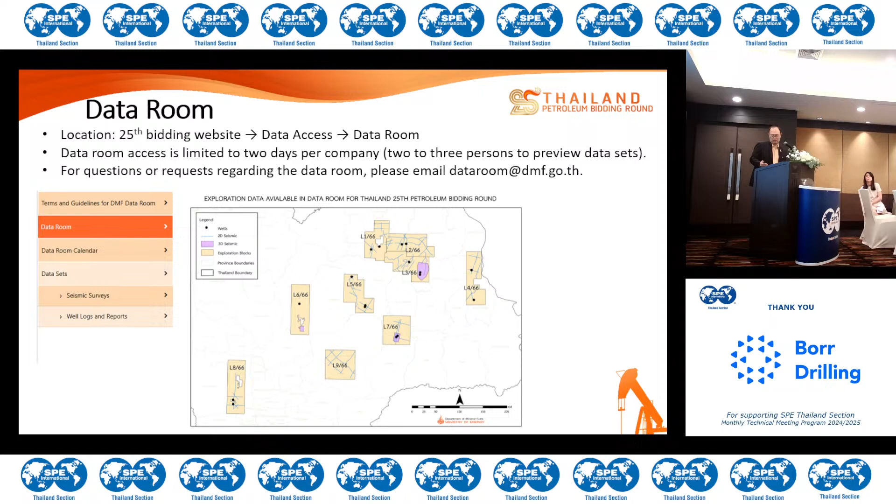Basically, the goal is to preview data sets. So not all the data sets will be available in the data room. Only some are selected. But a lot more data is available, right? To get to a data set, you go to the DMF website, go to the 25th bidding round website and data access, and click on the data set tab. So data sets can be purchased. You can select the seismic lines that you want. You can select the wells that you want. All the prices will be available in the Excel sheet, and you can check out the details later.

Okay, that's it. Thank you for your attention. If you have more questions, go to the website, right? If you have general questions, email Petroleum Bidding. If you have a question about the data room, email data room. If you have a question about data sets, email DMF e-commerce, right? Thank you.

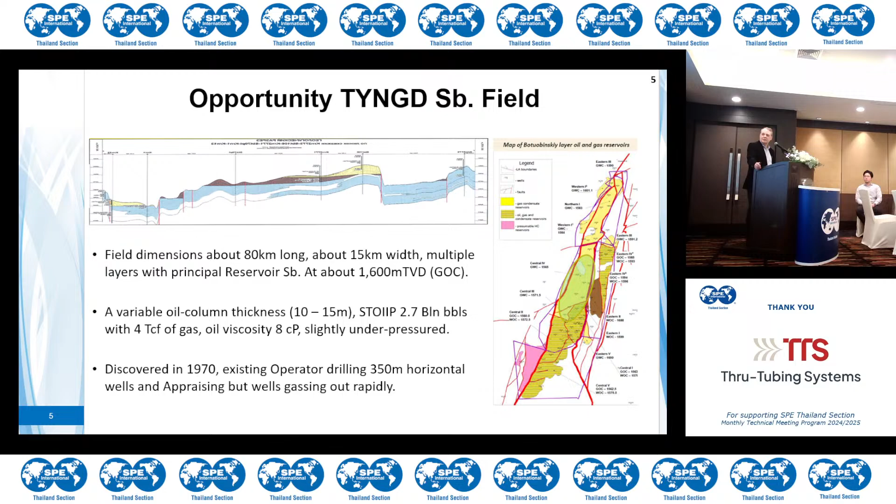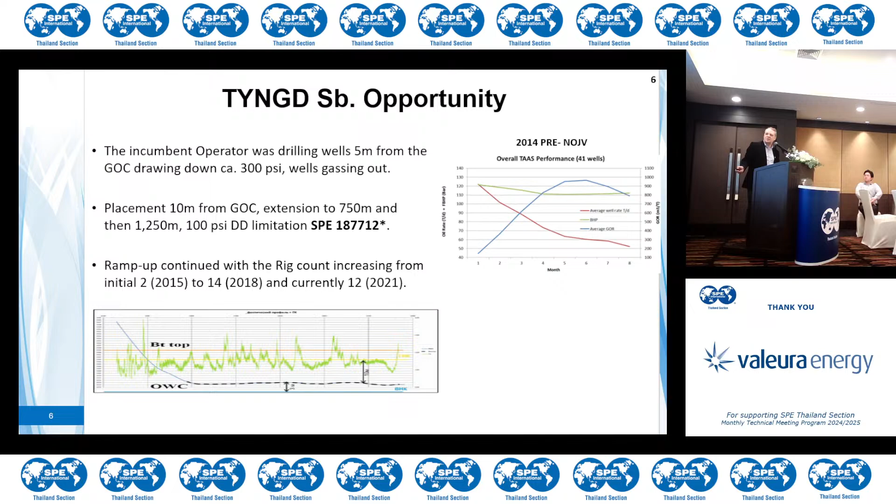So the incumbent operator was drilling wells about 5 meters from the gas oil contact, drawing down about 300 psi, and not surprisingly, the wells gassing out. Placement a further 10 meters from the GOC, an extension to 750 meter horizontals, and then 1250 with a more limited drawdown allowed some more longevity in the wells, if you like. But a plant was well underway that could produce 100,000 barrels a day. This approach, because more of the field was turning up below gas than originally perceived, was not going to deliver the PI on a well basis to fill that plant.

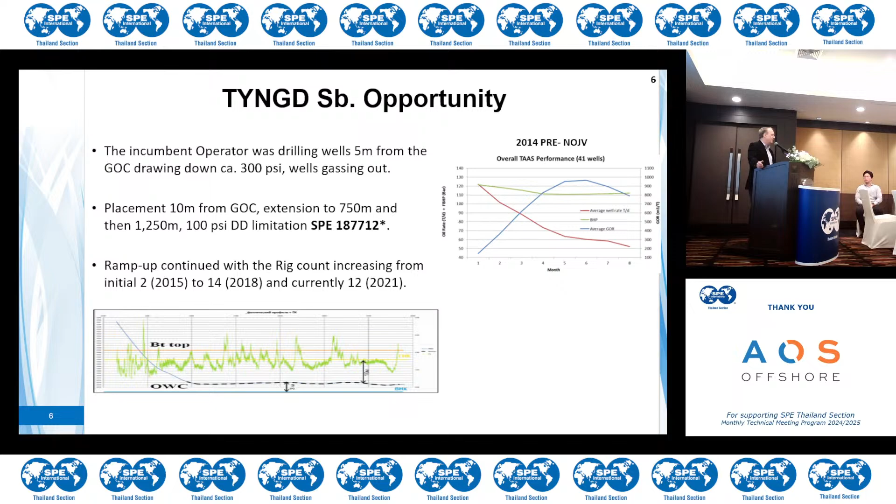The obvious answer would have been to produce at 50,000 barrels a day and pace the development appropriately. The management don't like that when they've invested in a plant that's twice that capacity. And the rigs are arriving. You know, the logistics are in place. You've got the winter arrivals coming. We're up to 14 rigs now, constantly increasing. So real problematic. And this is just a plot of what this looks like.

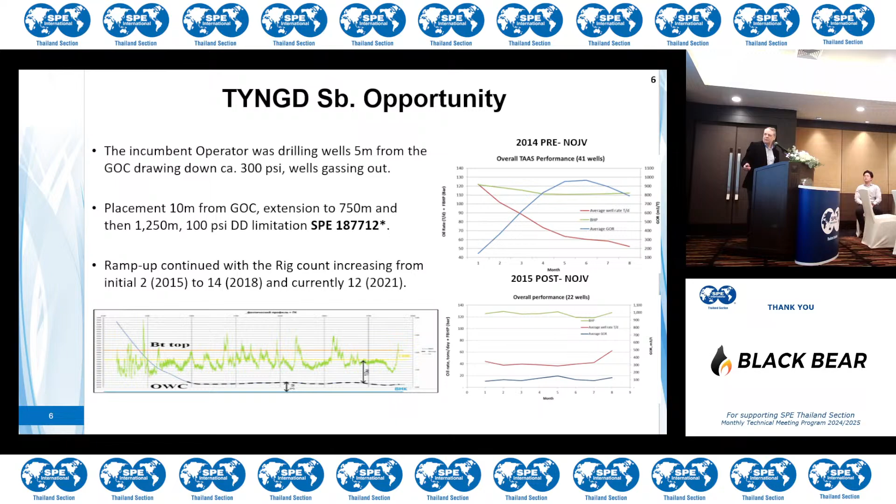Here we can see a GOR increasing on the original well styles, and when we were able to drill some of these wells, we could keep the GOR in a more reasonable position, but there was a limited amount of thickness that allowed this to be done, and a limited amount of locations that we could pick to progress that.

So we had to think of other solutions, and the next solution was to start determining what a more appropriate drilling approach might be. Appraisal information started to come in from the southern wells, indicating that it was mostly below gas and not above water. The STOIIP reduced conveniently from 2.7 to 1.8, which put more pressure on the team to make this an economic outcome.

And as I say, northern bias with the formation shallowing to the north, so getting closer to the gas. And the field geometry moved from this 25% above the gas and 75% above water to much more the other way around. So a real problem. Plant commissioned, expectation of 100,000 barrels a day, smaller field, reduced drawdown. How are we going to manage to deliver that?

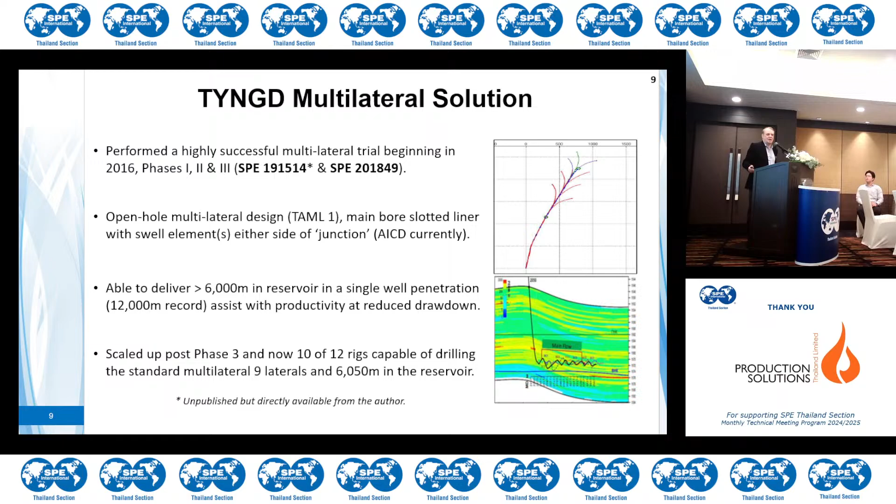This is what the core of the field looked like after further appraisal had taken place. And there was a solution. It was a relatively straightforward one. It was Canadian style, TAML 1 level multilateral drilling. Very, very successful. Started in 2016 and passed through 3 phases of experimentation in what could be done.

This is what a standard multilat started to look like, with, in this case, 7 laterals and the mother bore just tailing off there. And these were delivering about 6,000 meters in the reservoir versus the original 350, 400, 750, 1250. So basically a lot less drawdown, but a lot more exposure within the reservoir. And now you're able to deliver the PI on a well by well basis that will give you a solution for the same wellhead count or less.

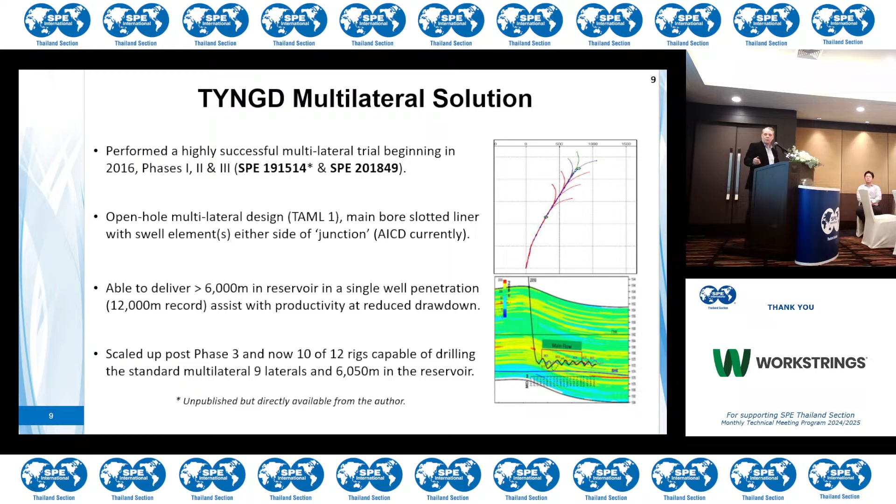So this simple TAML 1, originally all open hole, drilled out from the heel, as I say, Canadian style. If you go to the Shaunavon, which is kind of the tight sands north of North Dakota, getting into Canada, you'll see wells with 25 and 30 and 40,000 meters drilled in the reservoir. As long as the drilling's fast in the reservoir, it's a really great way of creating PI. Simple junctions, though, is the solution.

And in this case, we did start to add a mother bore. So we would run a liner in with swell elements and a sliding sleeve opposite each lateral window, so that if GOR showed up when you're changing ESPs out, you have the opportunity to experiment with closing a sliding sleeve or two very easily. You're going to change the ESP. It's just a little bit more jointed pipe to go on a pulling unit to go and close one of those sleeves. So able to deliver 6,000 meters in the reservoir in a single well.

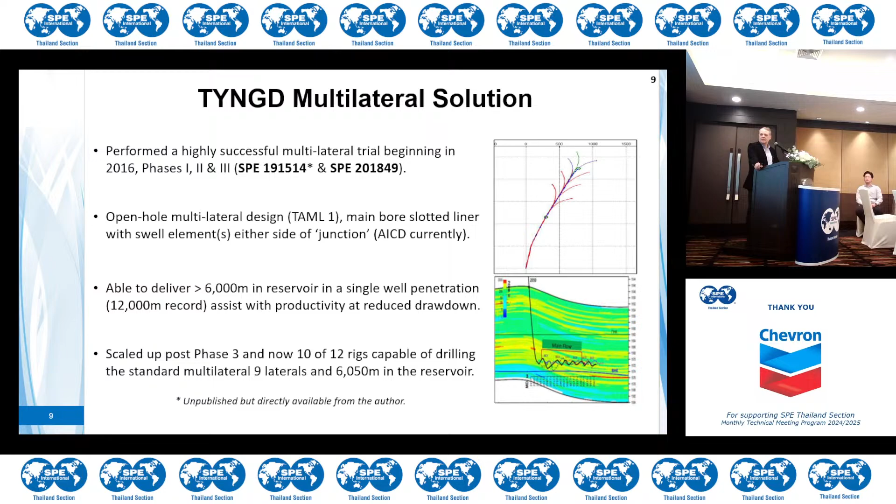12,000 meters was the record, something we called a birch leaf, and it assisted with the productivity at this reduced drawdown, and scaled up post phase 3. And now about 10 of the 12 rigs that we had were capable of drilling these. The standard multilateral with 9 laterals and 6,000 in the reservoir. So a huge learning curve that's in the papers.

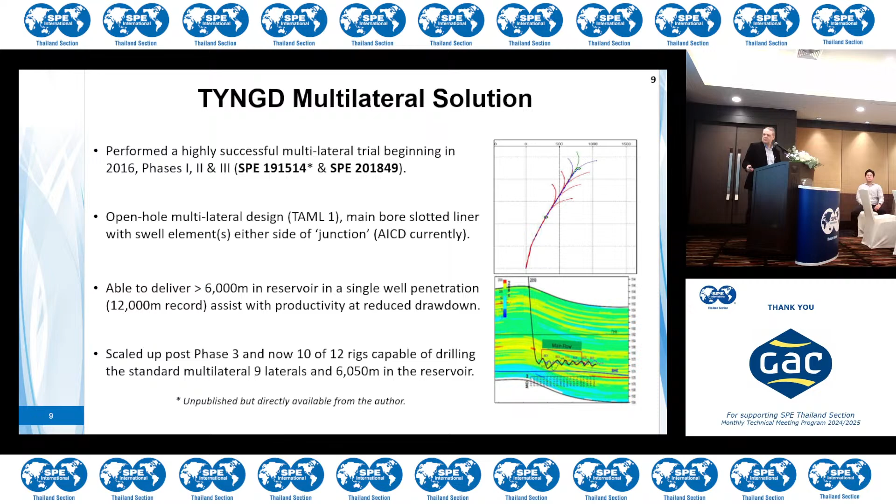This talk isn't really about the multilaterals, but the window cutting in open hole within the reservoir was originally taking about 12 hours to do, and I think they got it down to an hour and a half. So it just gets faster and faster, as drillers tend to, and relatively straightforward.

Usual pad completed with 15 horizontals by the incumbent on the original design, 400-meter horizontals, but a multilateral pad only requires 7 wells. Average drilling time was about 40 days for one of these 1250-meter horizontals. Started with about 60 days, down to 50 when I left in 21, and I believe down to about 35 now. The PI increasing 4 to 5 times on a conventional horizontal, and the cost just fractionally more.

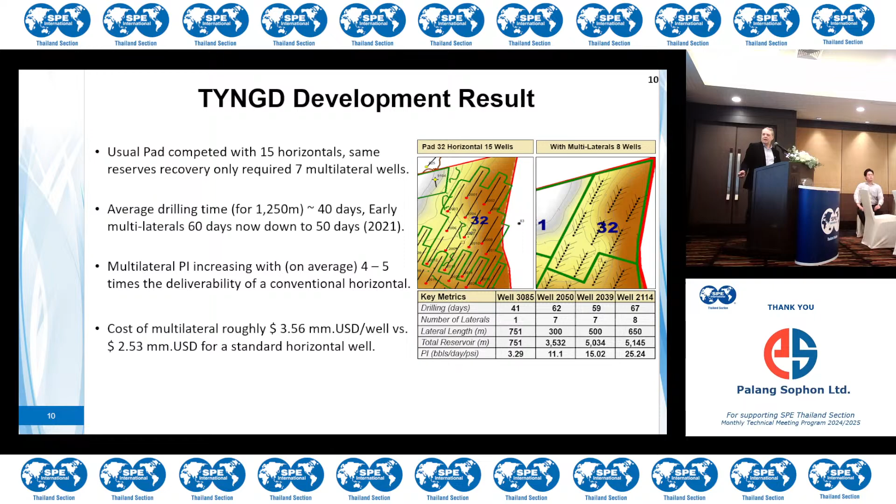In terms of you're in the reservoir, you've done the overburden piece, and now you're just adding reservoir coverage, and the numbers work out here. So an 8-well multilateral pad can deliver about 8,500 barrels a day for about $28.5 million, where a standard 15-well horizontal delivers just over half that for considerably more cost.

But that's not what this presentation's about. We've been presented with one problem. The reservoir's totally changed. It's halved in size. It's mostly below gas. What are you going to do? And the reaction time was quick, and everybody pitched in, multilaterals, straightforward. Now we're great. Now we're hauling oil off, and now we're getting major losses in the reservoir.

There'd always been losses in the reservoir, but now there's no gas injection taking place because that bit of the plant hasn't been built yet. But they want the 100,000 barrels a day. We're drilling the wells fast, we're hauling the oil off, and things are going to hell in a handbasket in terms of losses.

So, quick overview of the casing design. There's an upper cemented piece just out of the casing above the reservoir that requires this, but it's open hole with this liner in. Pore pressure just subnormal.

There'd been no LOTs measured, or FITs, during the original work. So some leak-off tests were taken, and the fracture gradient appeared to be well above what we thought was the fluid density, the ECD in the reservoir.

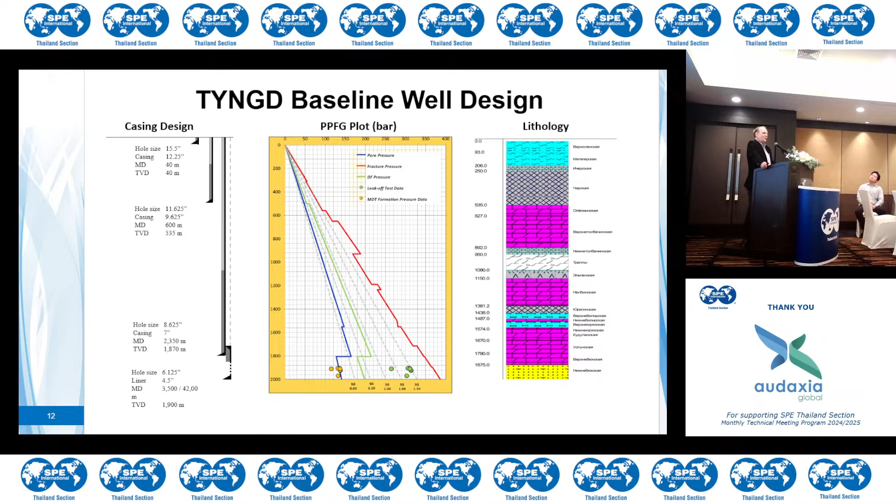However, there were features. We'd had losses in the reservoir. So just think of it on a probabilistic standpoint. You're going up from 400 meters drilled on the original horizontals in one direction. Now you're doing 6,000 meters in a 2-dimensional pattern. Your chances of hitting losses are going to increase if there are some features, and sure enough, that's what happened. So losses in the reservoir had always taken place, and on occasion appeared to be related to features.

So you could draw a map, a plan view, and you could see: I'm drilling my second horizontal off this pad, I'm going to be hitting losses soon because I did on the well next to me and the well next to that. So there were these uncertain features that appeared to create these losses.

Conventional fluid loss approaches had been used, but were becoming increasingly ineffective over time. As a petroleum engineer, the solution that was being applied was not one that I could really sign up for, and that was pumping cement in the reservoir. Effective sometimes in terms of curing the losses, but also curing production as well, quite nicely.

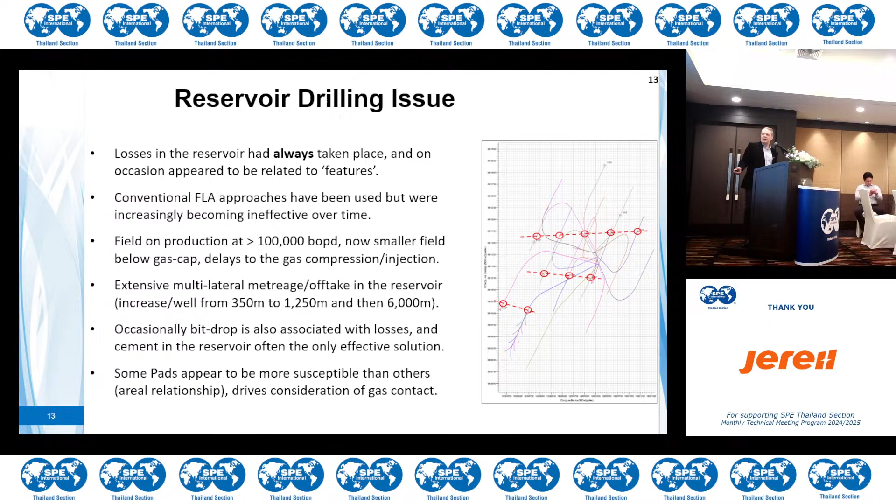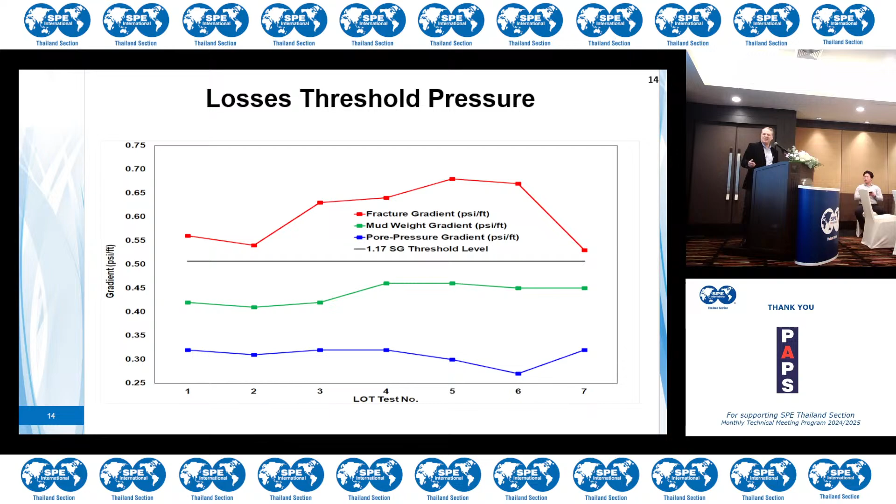And again, some pads appeared to be more susceptible than others, some kind of areal relationship, which was also a feature. Frac gradient likely to be around here. There seemed to be this threshold pressure, ECD, at which we opened things up, and that was an interesting fact. And the mud weight itself and the ECD, mostly below that in the early wells, but I'd say coming to cross this with time.

Cost of the losses in the pay zone. So cost of lost mud is relatively easy to calculate. It's very finite, it's a consumable, and we can see over the 3 years that this is increasing. We're up into $3 million worth of lost mud.

Rig NPT dramatically increasing year on year. Lost meterage drilling, which turns into lost meters of production. And so the percentage of multilateral wells encountering it increasing as well, or the percentage of multilateral wells being drilled, I should say, increasing as well. So more multilateral wells, more losses, more cost.

You're going up from 2 million to 12 million to 16 million. Where is this going to end? Is the fear. Number of multilaterals - so just the numbers in a tabular form here.

Tailored LCM pills were being used, carbonate plugs as well, cement plugs, multiple cement plugs placed in the reservoir before eventually giving up on that location and moving on to the next one. And so lateral abandonment early in the drilling feature.

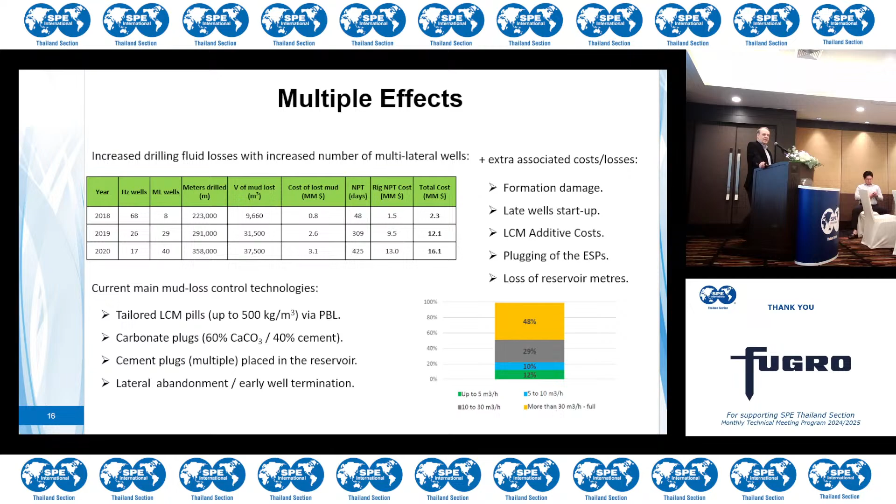And here's the interesting thing: Eastern Siberia, of course, just like Canada, lots of snow in the winter, but just like Canada, free water is really difficult to get hold of. There is none - it all drains into Lake Baikal. Lake Baikal holds 20% of all the fresh water on the planet.

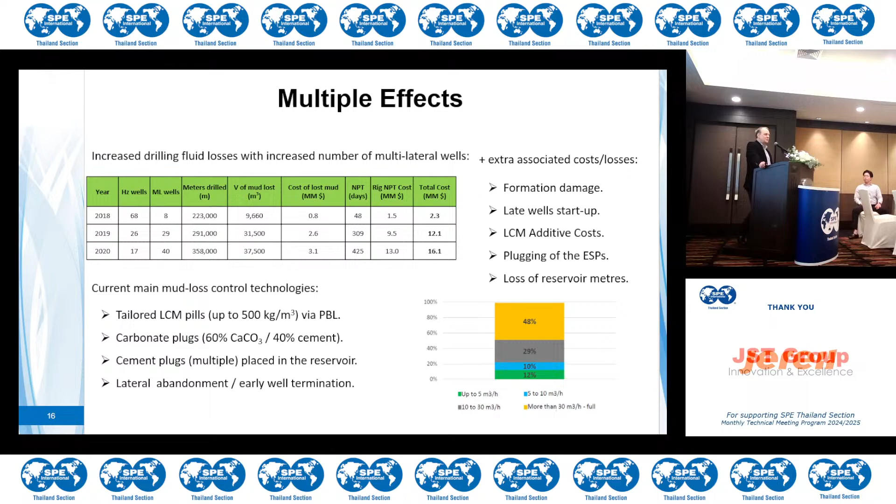It's a mile deep and 700 kilometers long, and the entire eastern Siberian plain drains into Lake Baikal. There is no free water, no running water. So it's very difficult, we helicopter water to rigs on occasion. That's what we have to do to move water in. So mud losses have this logistics issue associated with them as well, which is not the norm, and you have to cope with that.

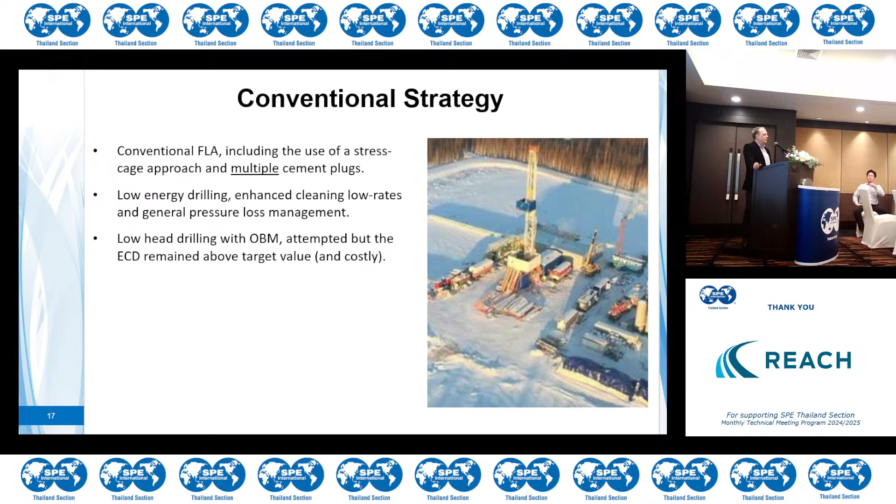So many facets to this issue. Trying conventional fluid, we all know the treadmill of dealing with losses and the increasing cost and complexity that this contains. Conventional fluid loss additives, perhaps use of a stress cage approach, which I'll talk about later. Multiple cement plugs, but reducing impact of that approach. We looked at low energy drilling, dropping all of the pressure drops out of the system wherever we could, and gained ourselves a little bit of time by doing that.

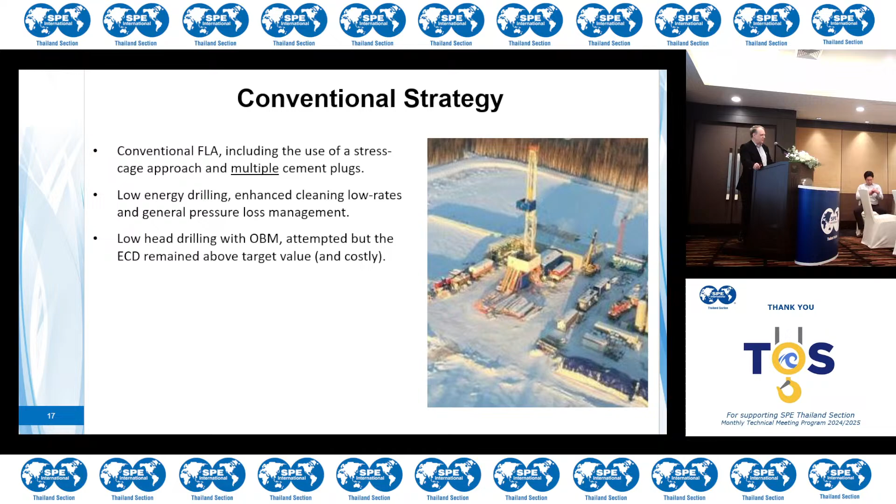And then low head drilling with oil-based mud, we attempted that as well. We converted a rig over and did a couple of wells, but it wasn't as effective in terms of ECD as we'd hoped. And because we're drilling multilaterals, you've got a lot of ECD when you're drilling these laterals, a lot of small hole with the assembly in. And it's costly because the rules have changed in Russia, so disposal of OBM, you kind of own those cuttings for the rest of history, the next 100 years. You don't just dispose of them and pass them on, you are liable, and it becomes very, very costly to manage.

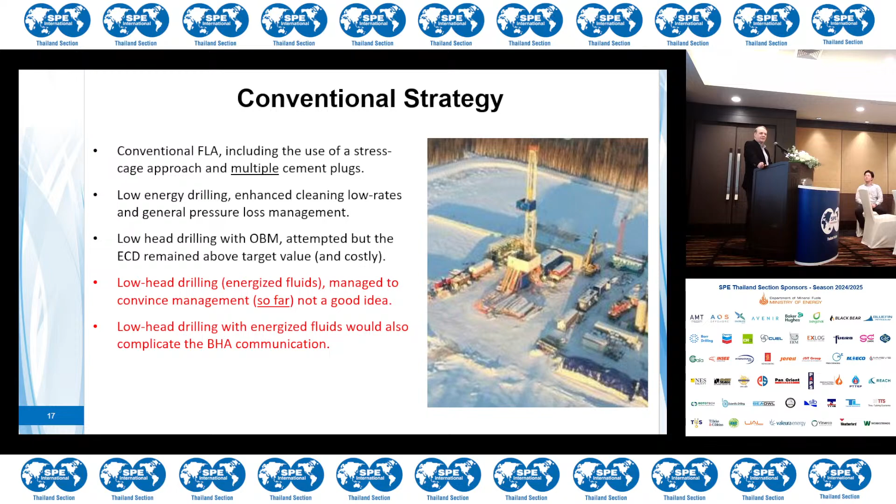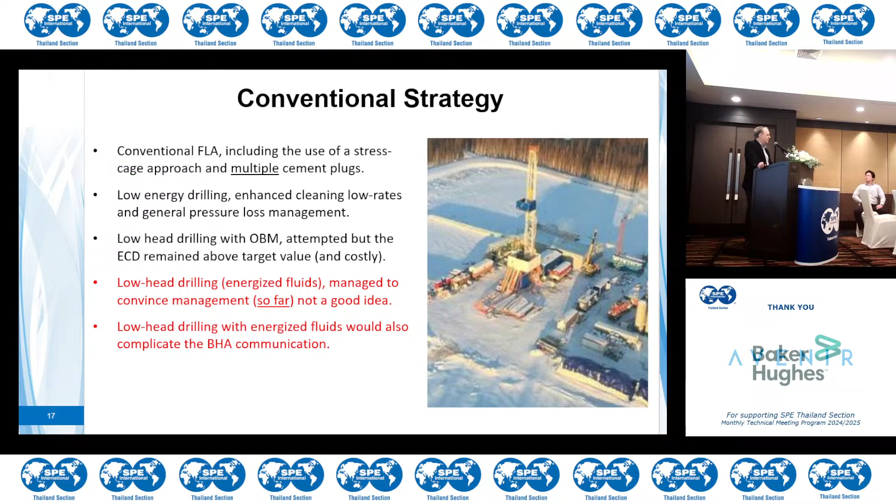OBM cuttings. There'd been a lot of enthusiasm for low head drilling, like energized fluids, and I put this down to technical engineers. Our technical disciplines are very much like our children, we prefer our own, and we love working on things that are very interesting. So all the engineers wanted to do MPD and energized fluid drilling, but think 12 to 15 rigs with rotating heads, nitrogen generation, in the depths of winter, in the middle of nowhere, with poor logistics. Technically extremely interesting, but absolutely costly. Costly in terms of just the physical cost, but also the HSE cost, because it's not an oil field that's going to do high tech very easily.

Again, it's much more like Canadian style oil field, more the agricultural end rather than the space race end of the field. So we also needed BHA communication, because you're trying to directionally drill these multilaterals, you need that ability to communicate. And as you know, that becomes increasingly complicated in energized systems. The solution we actually implemented, which was quite novel, was low head drilling using entrained hollow glass spheres in the standard mud systems for a direct reduction of SG.

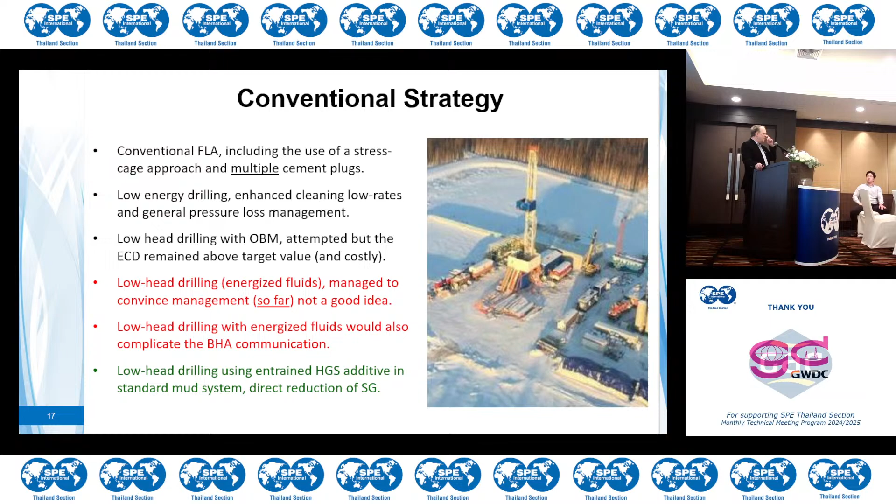So you may be familiar with hollow glass spheres, typically used in cementing systems when you have an ECD problem on cementing, to get the ECD down so you don't frack the cement away. A lot of cement jobs have been fracked away over this industry's lifetime. But one way to do this is to add these inert 50 micron spheres, which float in water, have a very low SG, and allow you to completely change your world in terms of ECD. So quite common in cement.

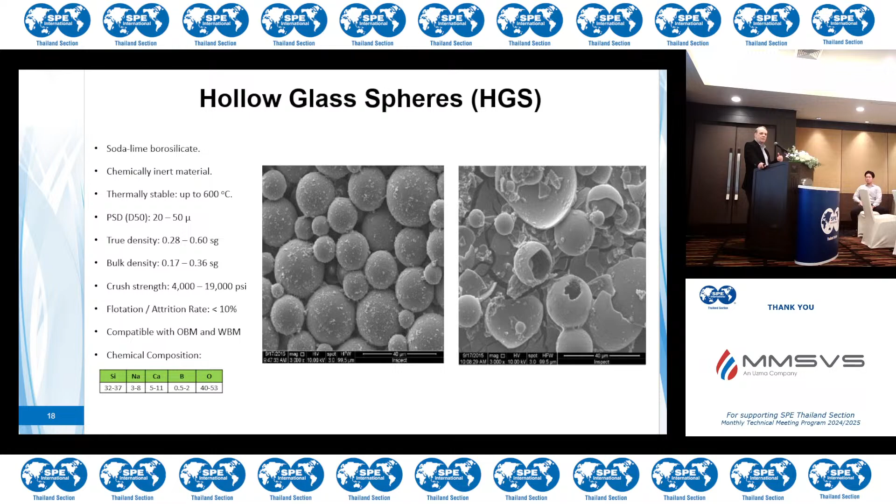Talking with some people earlier, I think in Vietnam there's a fractured basement field where they always pull tubing using this. They use this in the fluid when they want to pull tubing, because they want to keep a static fluid in the well, but if you try to kill the well, you kill the production you're trying to get back, so they use entrained HGS for that. There'd been one or two sidetracks around the world, infill in very mature fields where they'd just added to the mud. But this is the first true application I'd come across, where these spheres are being added into the mud system to give you a full drilling system that you're then going to drill the well within the reservoir.

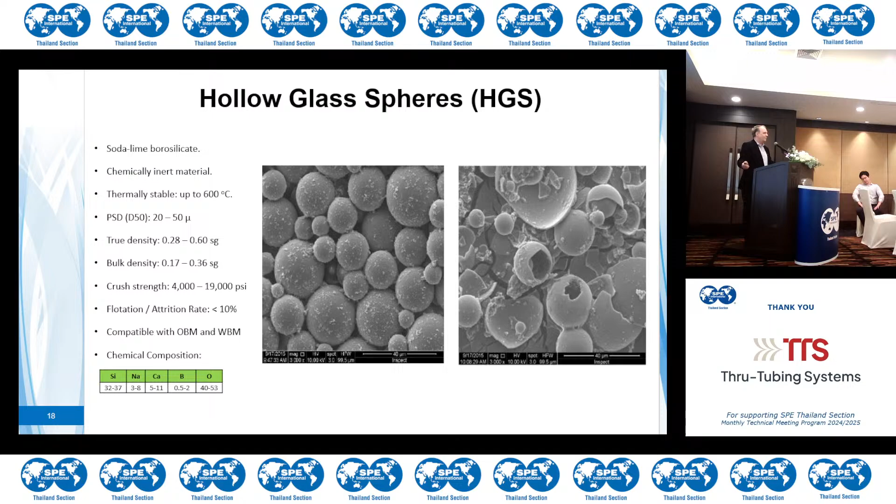So very low density, varying crush strengths, so you can buy them in varying grades so they'll be more resistant to crush than others. So if you're in very deep wells or very long wells with a lot of attrition potential, they will crush as you drill, so you have to replace them. Of course, there are different ways of separating this material out as it comes to surface, which we'll talk about. But the point is they're inert.

Apart from breathing, normal respiratory apparatus, you cut sacks and just add them to your mud system. They don't interact with anything. A lot of fears when we talked about this were about how all the drilling equipment's going to plug, all of the production equipment's going to plug. And none of that occurred, but we'll talk a little bit about that as I go through it.

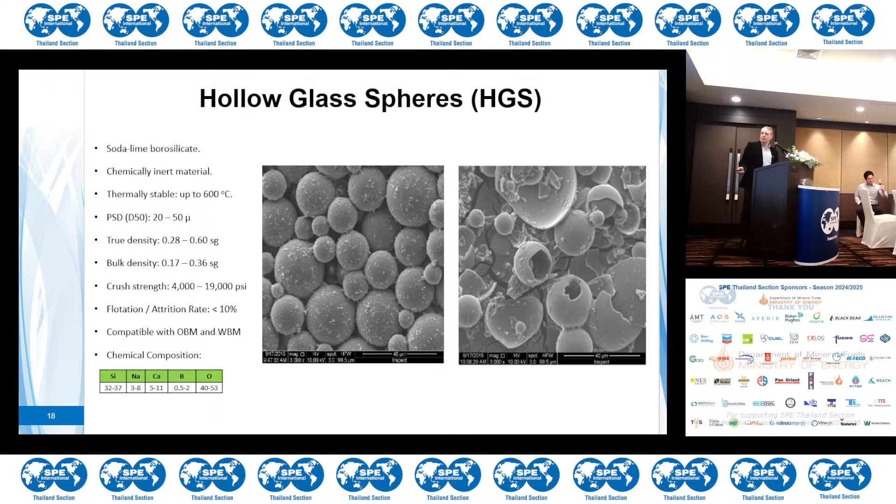So a very simplistic system, had been around for many years, had been used in cementing, was costly because there was only one manufacturer some 10 years ago. Now there are many, many manufacturers of this material, and the cost has appropriately become much, much more affordable than it was.

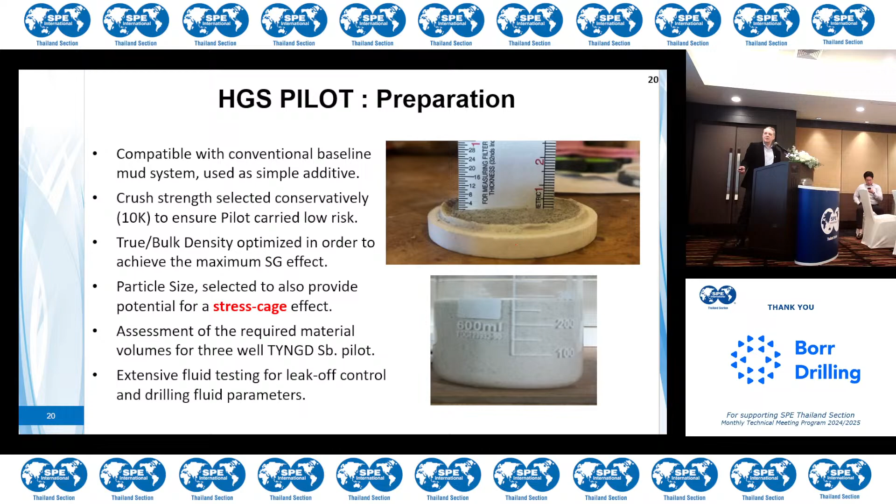Very compatible with the conventional baseline mud system. It's just an additive. But you do need to then consider the additives that you already have in your system for building filter cake, and adjusting it to take into account not only the spheres in their normal state, but as you drill and you get crushed material within the system, it starts to replace the normal fluid loss additives that you put into a system.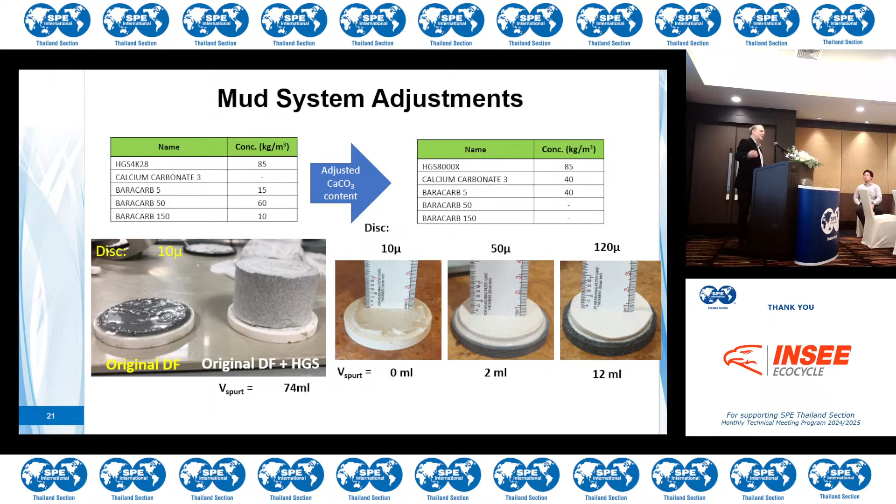We've conservatively selected a high resistance crush system, 10K. So it was about in the middle of the range available, because we didn't want to do the pilot 2 or 3 wells and then say afterwards, if only we'd used 15K, or if only we'd used 5K. So we picked something that was a little conservative. That does affect the cost. In fact, since this, they've dropped down to a 5K system, and it works quite well for them. So the true bulk density was then optimized to achieve that, to get below that threshold pressure.

The particle size was selected to get a kind of a stress cage effect, which we saw, and I'll show some evidence of that as well. So those of you familiar with stress caging know that you can size particles in a mud system, the range of particles, the PSD, the particle size distribution, and you can drill across a formation, frac it with mud, and then plug the frac before it develops, certainly in permeable formations.

So in the Gulf of Mexico, this is standard practice, stress caging that's been around for probably 20 years now, and you can drill with a mud weight that's 5,000 psi over the frac gradient relatively easily. But you have to keep that size distribution right, because you're basically doing really bad fracturing, really bad prop fracturing. Leak off takes place in front of the frac, and you plug it, and then you can drill across the frac with a mud weight way above the frac gradient. We believe that we might see some of this, so we tried to size our range to capture that.

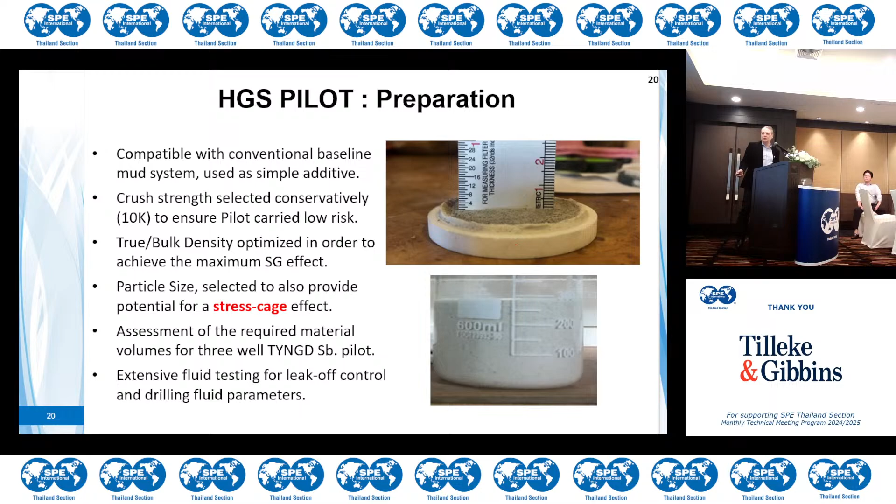An assessment was made of how much we needed to do, 2 or 3 wells, and some extensive fluid loss testing for leak-off control and drilling fluid parameters. When the system was just added to the original mud, we got a hell of a filter cake pretty quickly. Not unsurprisingly, as a frac guy, I can tell you beads plug things really easily. They do it really, really well. They're really efficient. Because of all the other additives in the mud system, this is the typical mud cake.

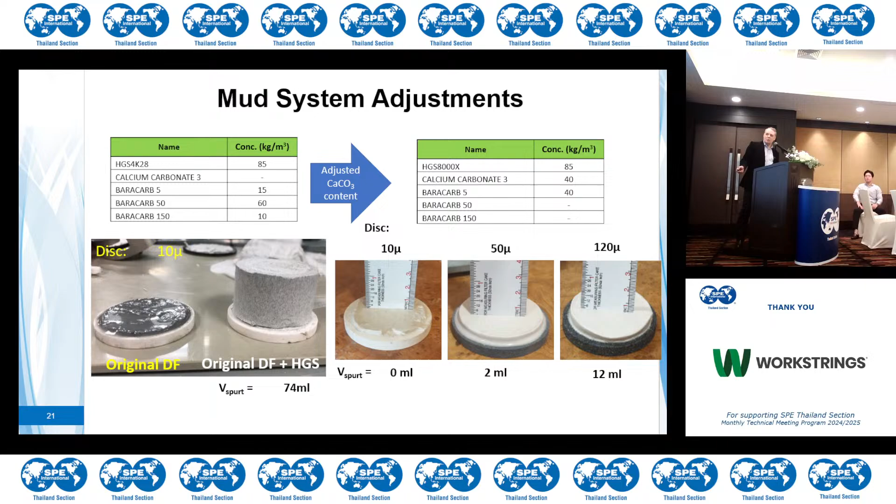This is with hollow glass spheres. You obviously don't want this. So changing the distribution in the mud system, taking things out of the original mud system, not just adding in the hollow glass spheres, we were able to, on different disc sizes and slots, block 10 micron, 50 micron, 120 micron particles. So we're able to bridge these different sizes very easily. It's great bridging material. Again, as a frac guy and a screen-out aficionado, what can I say? Beads plug really, really well.

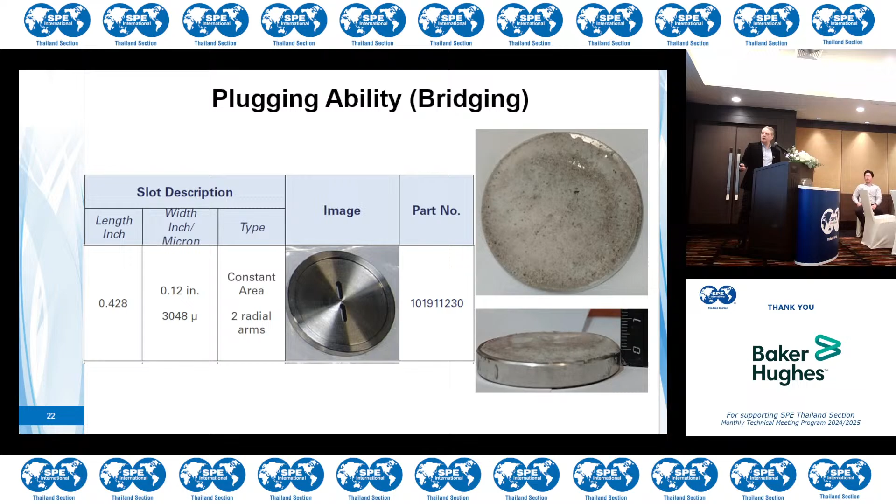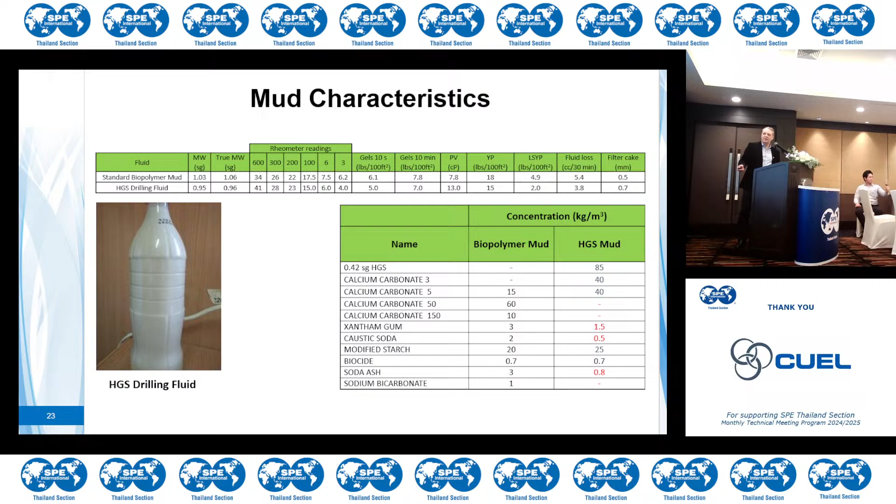The mud characteristics: the standard biopolymer mud here, and then this hollow glass drilling fluid. We're getting down to a mud weight of 0.95. That's where we wanted to be roughly with this mud for the ECD that we wanted to be at, and it was relatively straightforward to achieve that. The mud, of course, is white, which kind of freaks people out a little bit, but other than that, it's just an inert mud system. And here are the changes that were made to the mud.

All of this is published material now. We looked at regained perm and followed the normal sequence, and actually looked at some acidization and some removal as well. I won't delve into this because it became a whole piece of work on its own.

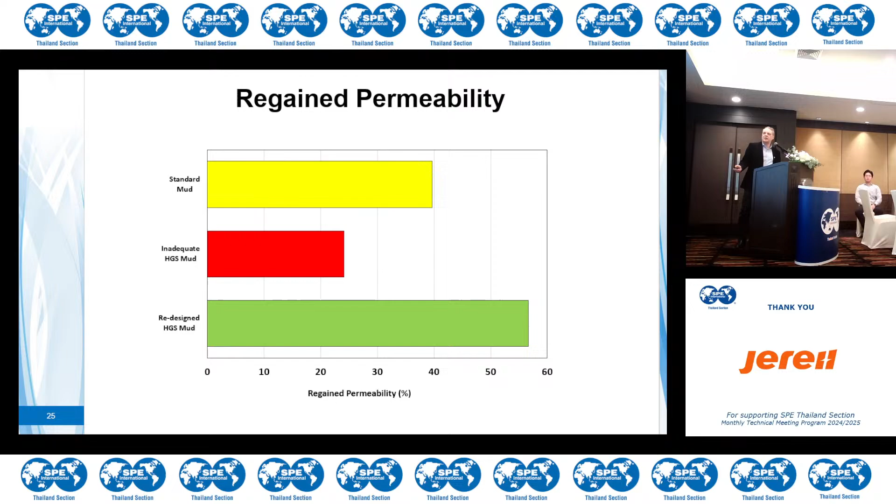What I'll talk about is this: the standard mud system was giving about a 40% regained perm. The inadequate design, just adding hollow glass spheres to that standard mud system, was giving us about 25, not where we needed to be. But then the redesigned mud, with the distribution that was required for plugging, was able to get us above where we were with the original mud, and I believe this work has continued to improve further as well.

3 trial wells were selected. A well we were just going to start drilling with hollow glass spheres mud, and so we drilled 2 of the planned laterals on a 7 lateral multilat, and then swapped to conventional mud. When we swapped to conventional mud, immediate losses took place. It's almost like you have to prove to the management, this is what it's doing. It's an ECD effect. Immediate losses on resumption of the drilling, which had to be treated in a conventional manner with cement plugs and everything else. And after 2 further laterals, they couldn't drill any further on that well.

A horizontal, because we had a pad with older horizontals on, and we wanted to have a formation damage measure, and we drilled the entire lateral with hollow glass spheres. All of the horizontals on this pad had suffered from losses. This one didn't. We drilled the entire reservoir section without any losses, and we'd never been able to do that, as I say, on this pad before. So an indicator that, again, it works, and a production comparison then with the offsets.

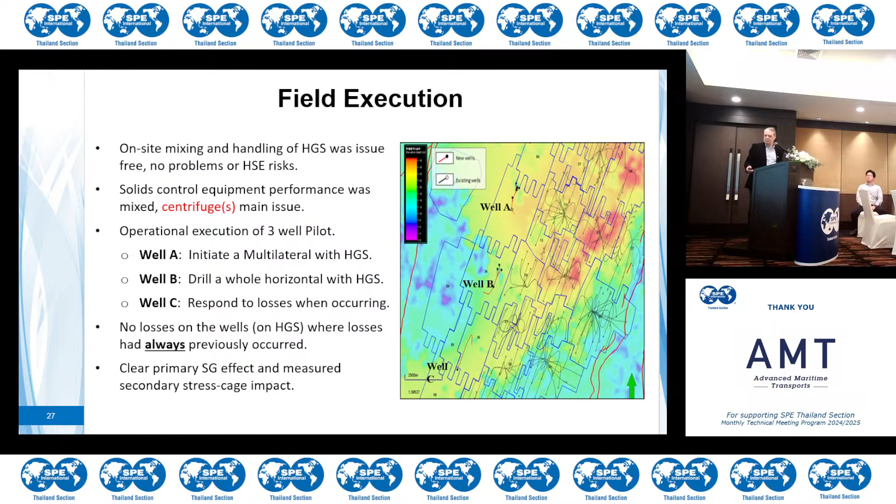On-site mixing and handling of the hollow glass spheres was issue-free, no problems or HSE risks. Of course, they are glass spheres. There will be glass powder in the sacks. There needs to be appropriate breathing protection when you're cutting sacks like that. Solids control performance was mixed. Centrifuges were probably the main issue, and operational execution of the 3-well pilot took place. No losses on these 3 wells where we've always previously had losses. Clear primary SG effect and a measured secondary stress cage effect.

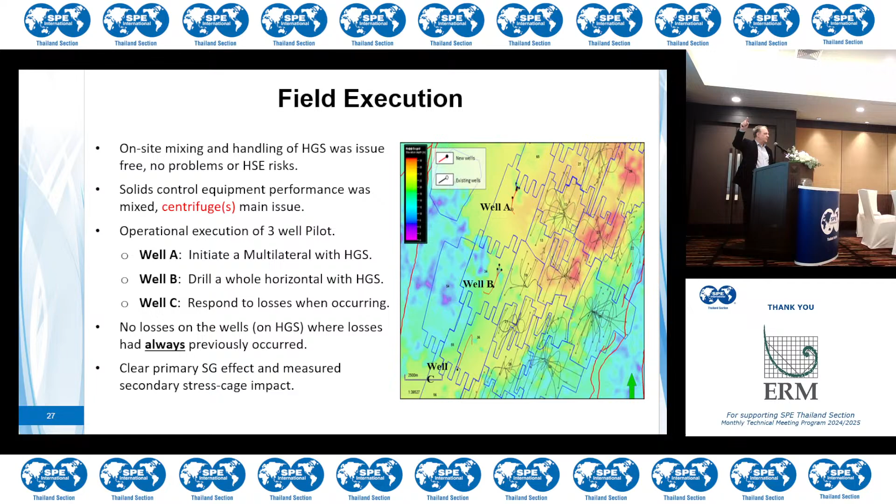And what do I mean by that? By that I mean that we'd cross the threshold pressure and see losses, change to HGS, drill ahead, no problem, go back to the normal mud system, and on the normal mud system, the threshold had moved higher. That means that something that's behind you has been stress caged, raising the threshold to opening that up. So there were some features that were taking a certain amount of solids, and a stress cage, an ability to place an inclusion within that and increase the threshold pressure for them to open up.

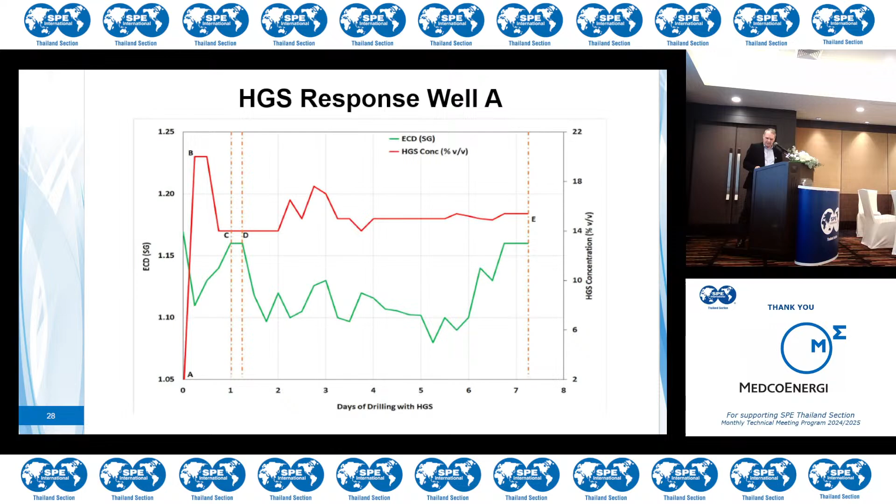Well reported in the papers on well A, where we drilled with HGS, able to keep the ECD where we wanted to until we couldn't anymore, and just the concentration of hollow glass spheres within the well. Again, in this case, we drilled off. We allowed the ECD to increase, but because we were building a stress cage effect, we were allowing the deterioration of the hollow glass spheres to take place. You lose about 10% of the effect for every kilometre that you drill. So if you don't add at that pace, you're deteriorating the effective ECD. But able to drill off and complete.

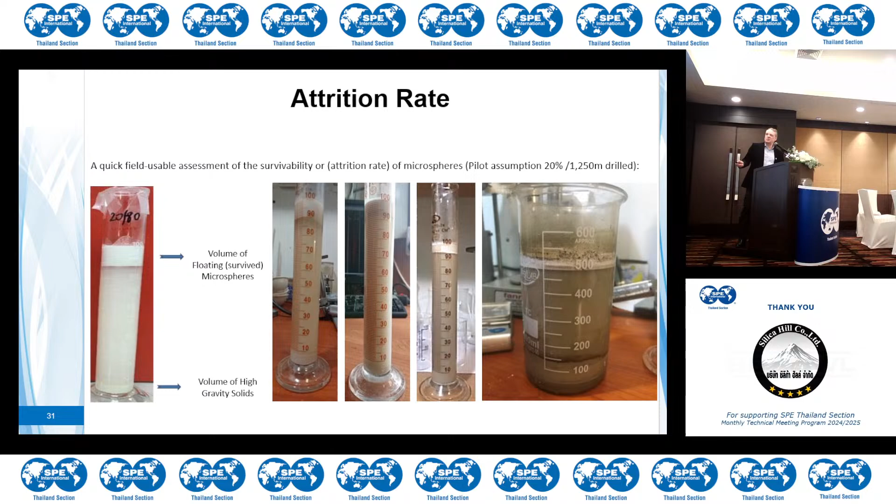And then just another example, losses while drilling, and then losses while attempting to place the standard mud system back in the hole and get our hollow glass spheres back to surface so that we could use them again. So the survivability rate, the attrition rate, if you like. Our assumption had been 20% for a typical horizontal well. And it looked like it was about 10% for these 10,000 psi crush spheres. I'm sure if they dropped to 5,000, which will be much cheaper, then that attrition rate might be at 20%. Clean fluid looks like this.

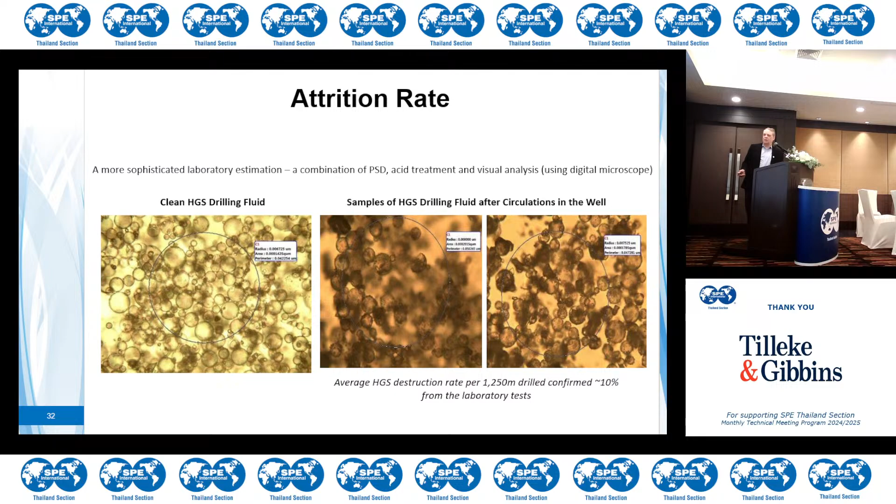Dirty fluid after drilling, and you're beginning to see some crushed material. For the crushed material, again, there are lots of different ways of separating it. It sinks. It becomes a great fluid loss additive.

One of the advantages of multilaterals is that in this part of eastern Siberia, there's something called a TRAPS formation. It's a volcanic ash deposition. And you can spend a month trying to get across it because it's vuggy, cavernous losses. And you can spend a lot of money on fluid loss additives getting across it as well. This became our material to just dump in the wells when we encountered that.

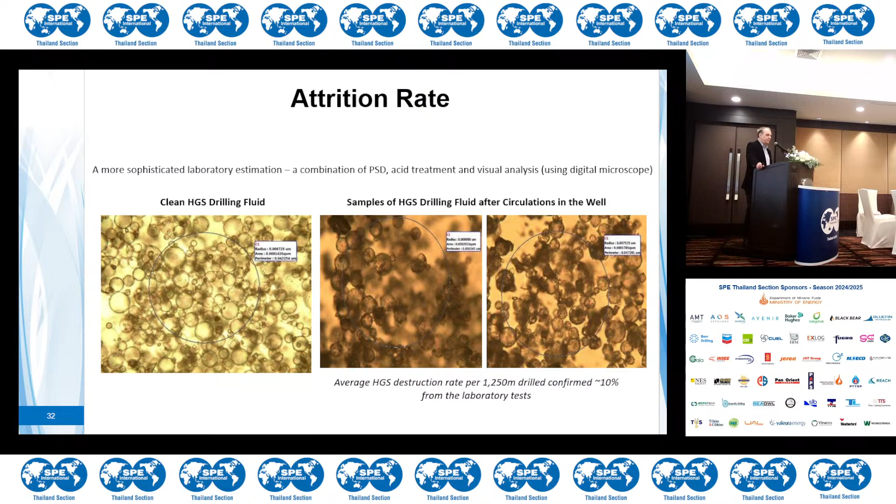But when you drill multilats, you've got 8 trips across the overburden per pad instead of 15, which was helping from that perspective as well. On the 3 wells, just an indication of where we were losing material or where the material was being used. We had no issues at all with the directional drilling equipment and drilling with this material.

And on production, when we move on with the pulling unit to run the ESP, some hollow glass spheres will be found at surface in the first couple of 100 meters floating on top, which you could just circulate out, but no impact on the ESPs whatsoever. So just produced through them, or crushing, a lot like ceramic proppant. It's just not abrasive enough to be a problem.

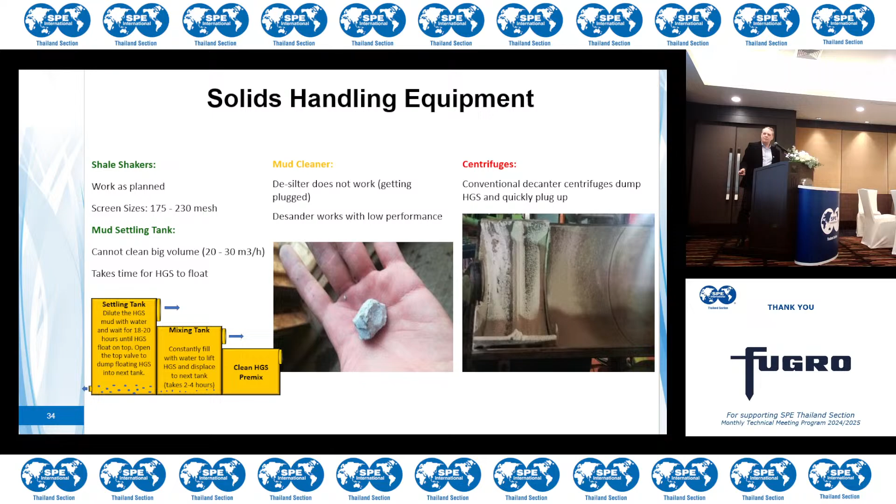The shale shakers worked as planned. Screen sizes were kept within range, and we had a mud settling tank, but you need to have a residence time, obviously, to get that to work. Desilter didn't work very well, and the desander with low performance, but tweaks were made to pipe work and operating envelopes, and this was addressed.

Centrifuges were probably the biggest problem. We were getting rid of good mud along with cuttings and bad mud. And a lot of work was done in Nizhnevartovsk with the mud company, back in Western Siberia at the main base, to see what could be done.

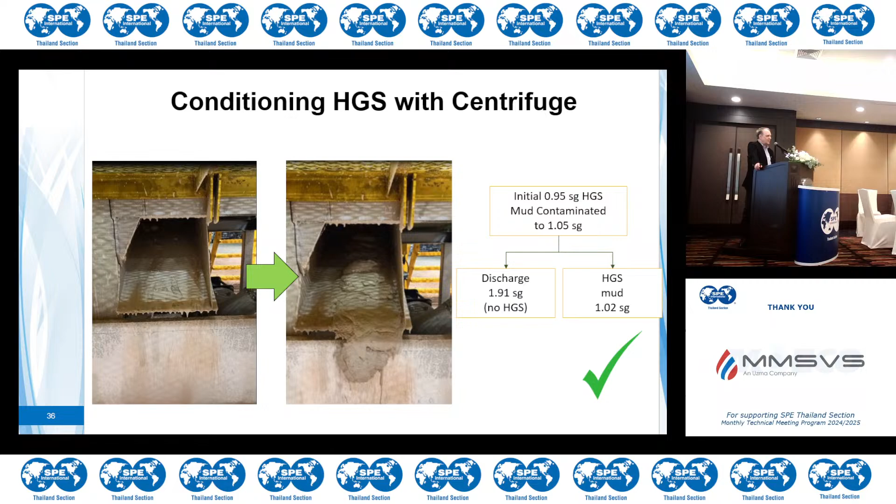A lot of subsequent work has been done by Exxon with the separation as well, because it's clear that they're lining up to do something with this kind of material in Guyana, I suspect, where they're probably dropping pore pressure very, very quickly. And so work can be done with a centrifuge to set it up such that it can give you the right form of separation.

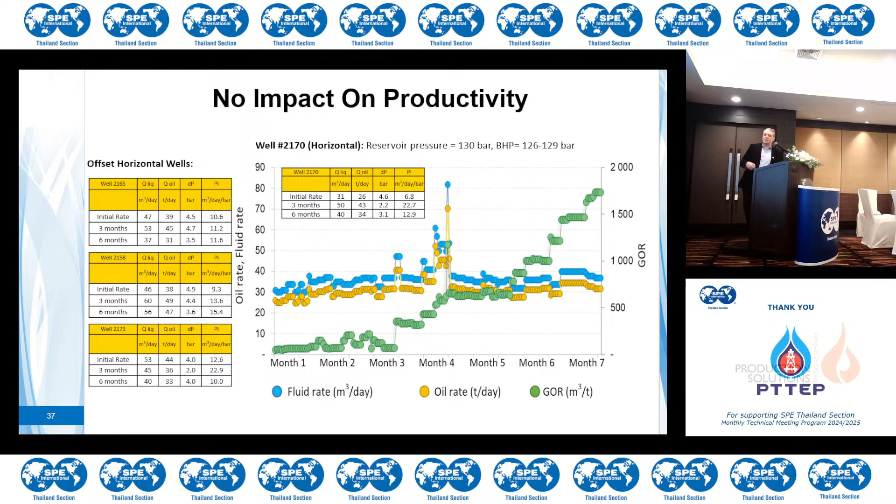No impact on productivity whatsoever. We were very happy with the offset, and I've heard, since I haven't seen numbers, that the changes that they've constantly made to the mud system to improve the regain perm has improved the overall deliverability. Certainly not worse than prior.

So hollow glass spheres significantly reduce the chance of losses occurring and the bridging of thief zones. Swap to a standard mud system reinitiates those losses, so just confirming it's all an ECD issue. A minimum concentration was determined to avoid the losses from actually taking place. No impact on downhole equipment, LWD or surface equipment.

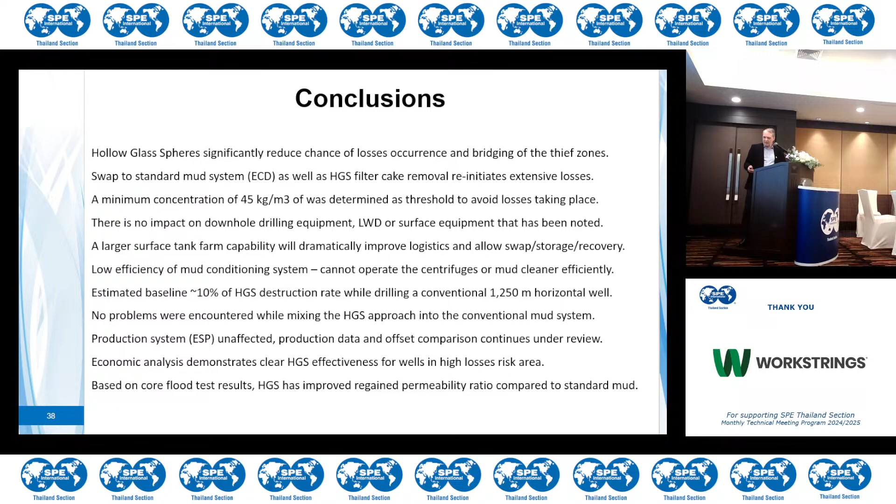Low efficiency of the mud conditioning, but I'll talk about it in just a moment. If you have a central mud processing facility, then you have the residence time to deal with this more adequately, and that's where they were moving to. The attrition rate was quite reasonable, 0 problems mixing, production unaffected, and really great economics of the overall system. So we felt that we delivered on everything.

We had expected to see a lubrication effect with beads as well. We thought that we would see some friction reduction in the system. Didn't really detect that, which was a little bit of a shame, hoping to see a bit of a benefit from it, but nothing that was noticeable. And then, the centrifuge was addressed at a later date.

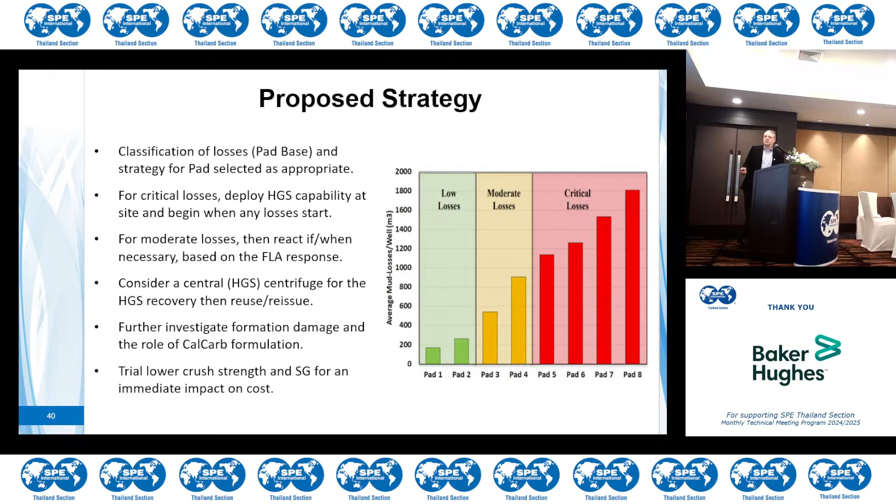The strategy that was then taken up was to classify losses on a pad basis, and the strategy for that pad would be selected as appropriate. So low losses you just deal with in the normal way. Moderate losses you may call out hollow glass spheres and use as started. So react if necessary based on the fluid loss response.

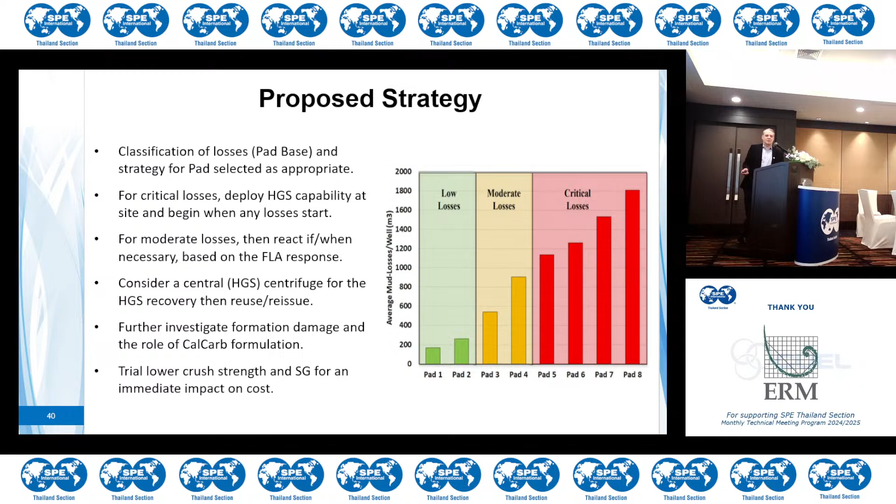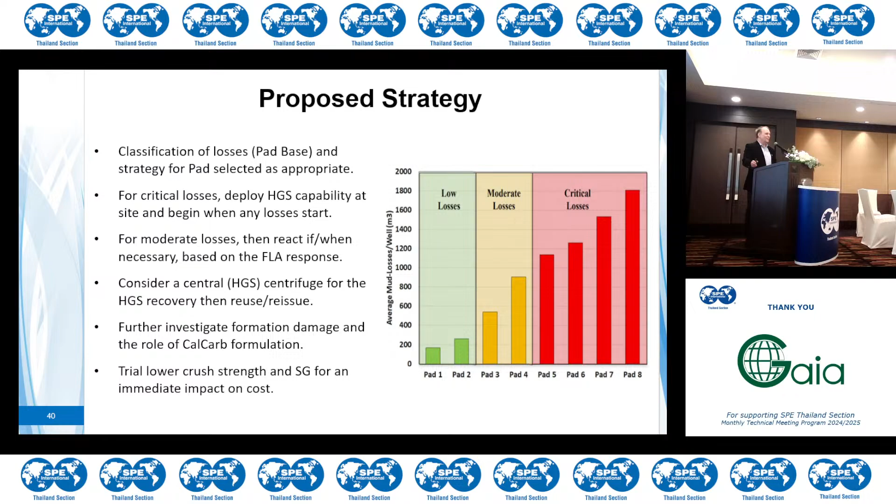And then a central plant with a centrifuge set up to recover that mud, process it and send it back to a location, reuse, reissue, again recovering the solids waste, the crushed spheres, so that they can be used as fluid loss additive. Continue to investigate formation damage as they did, and then trialing a lower crush strength just to knock cost. The one great thing Russians are good at is knocking cost out of everything. You implement something, it technically works, then it's stand back and watch them make it cheap as chips.

Short term, all performed now. Midterm, tender has been performed. Central plant is being scoped, and in 2023, the last I heard, it's now being used across multiple fields in Western Siberia as well as Eastern Siberia.

So on an economic basis, if you're drilling a lot in the reservoir, and we tend to be more and more now, then it can be a very cost-effective means of delivering it. I'd like to thank the co-authors of a number of these papers, Vitaly Sherishorin and Yevgeniy Tuzov, who contributed. And most recently, there was this APOGCE paper.

This is our birch leaf, very proud of it, 20,000 meters and 12,000 meters in the reservoir, and hollow glass spheres, what they look like. But a great solution at the right place in the right time to help us resolve the problem and keep the 100,000 barrel a day plant full, even though perhaps that might not have been the long-term best plan. Certainly from an NPV perspective, it was best, but we could argue about that forever.

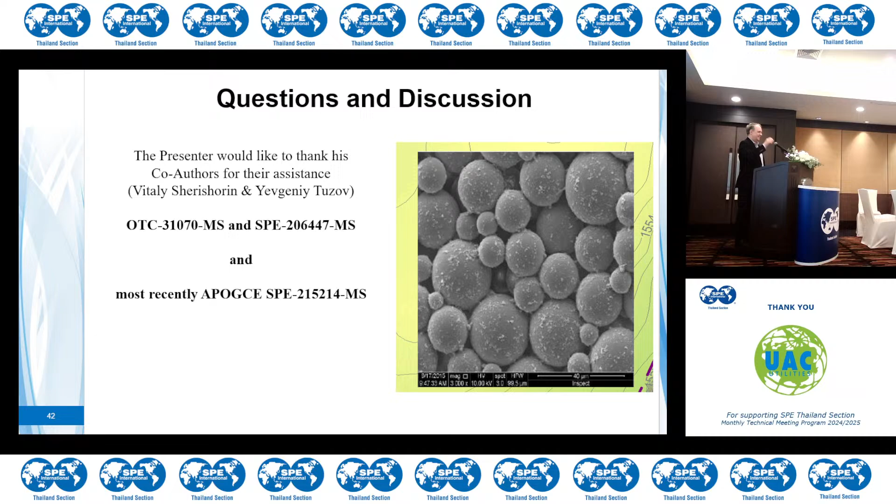Yeah. Thank you, Martin. I think that mic wasn't working as well. Okay. Thank you, Martin. I see a lot of drillers in the room, so I'm sure there's a lot of questions today. So again, please raise your hand, let us know who you are, and then ask the questions. First one. Oh, you have to stand more. Okay. If no one in the room, let me start. Sorry for technical problem. Okay, Professor, your question, please. You want to continue? No. Go on. I'm sorry for that.

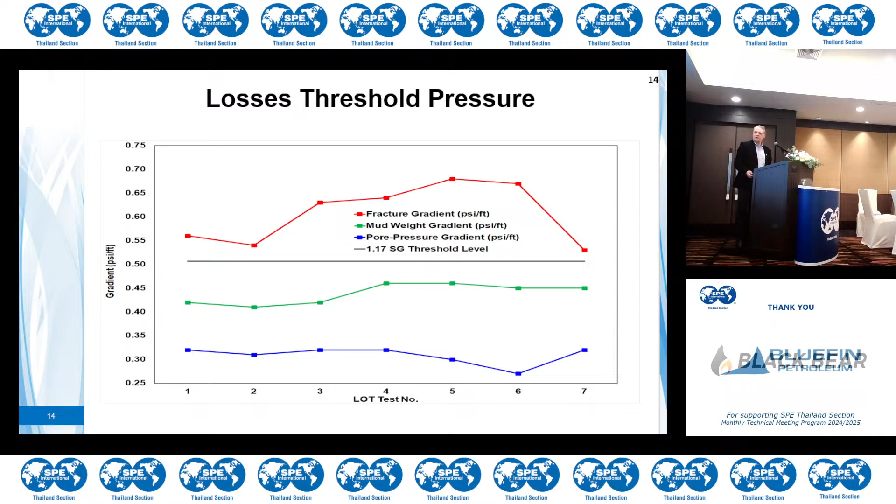You did mention in one of your slides that ESP production is unaffected. Is that because of the special treatment when you do the extra wellbore cleanup, or is it more by nature of it? So there were two points. The ESPs were not affected by the solids. The fact that the laterals contain these spheres at the end of drilling, 50 micron, they were unaffected. The ESP and production functionality was unaffected by them.

It was just produced through without registering any problem or plugging or causing erosion or issues on the pumps themselves. And from a formation damage perspective, the PI of the wells is actually better now than it was previously. So there's no damage to the formation itself. The production side got better rather than worse. When you use ceramic solids like this, it's a lot like fracturing. The fractures always produce.

If you go to Alaska, they empty one of the storage tanks every year at Valdez, and there's 2 feet of ceramic proppant in the bottom of each tank. It's come all the way through the processing facility, all the way down the Alyeska pipeline, to Valdez. It's such an inert material, ceramic. It doesn't erode. It passes through equipment rather than eroding it, unlike sand. I was not surprised at all when there was really nothing reported. Silence is good. No issues.

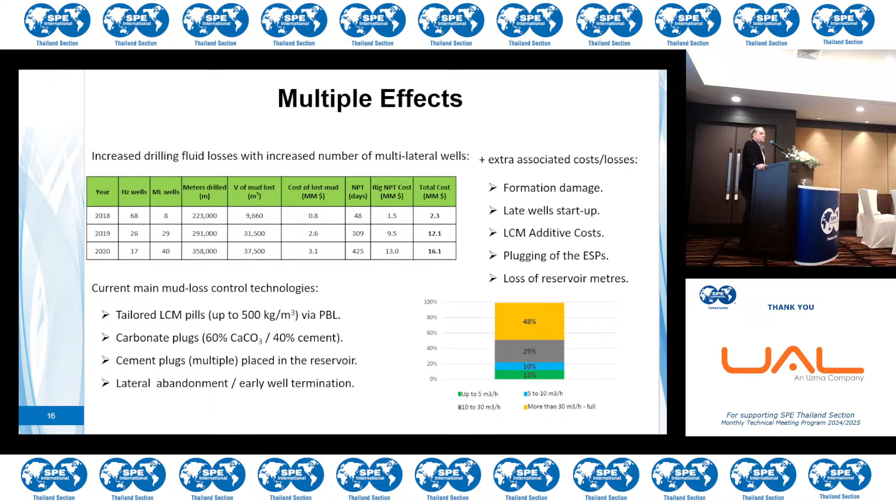First of all, I suspect many of us in this room are going 7 multilaterals, $2.7 million, and our heads are falling off. I'll let you address that in a minute. But love the productivity index concept. One question and one ask. Question: have you seen this applied to carbonate reservoirs with significant fracturing to support losses? And the ask is, I like the innovation. How can we get your brain on our limited resources to help us out on the drilling and mud control?

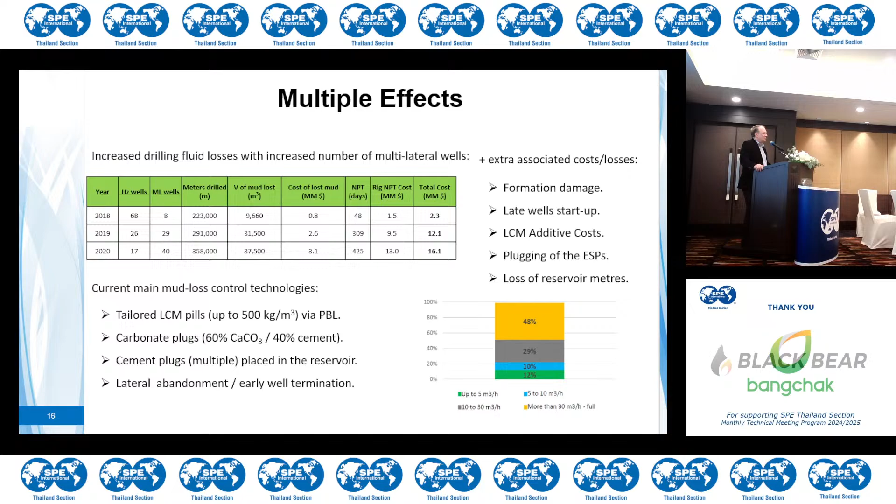It is tremendously cheap to drill in Russia, but that's often because if you go to Western Siberia, you go to Nizhnevartovsk, and the town is owned. It was owned by TNK-BP, but it's now owned by Rosneft. Everything that's taken there is owned by the company, and so there's probably an underlying cost that's not accounted for, but it is tremendously cheap to drill.

Even if you were to double those costs, you'd still be quite comfortable, I would think. But there's an underlying piece, I suspect, that's not accounted for. A lot of those drilling rigs were Rosneft drilling as well. Great rigs, but owned by the company. So again, are all the true costs being passed through, or is there some under the table work going on?

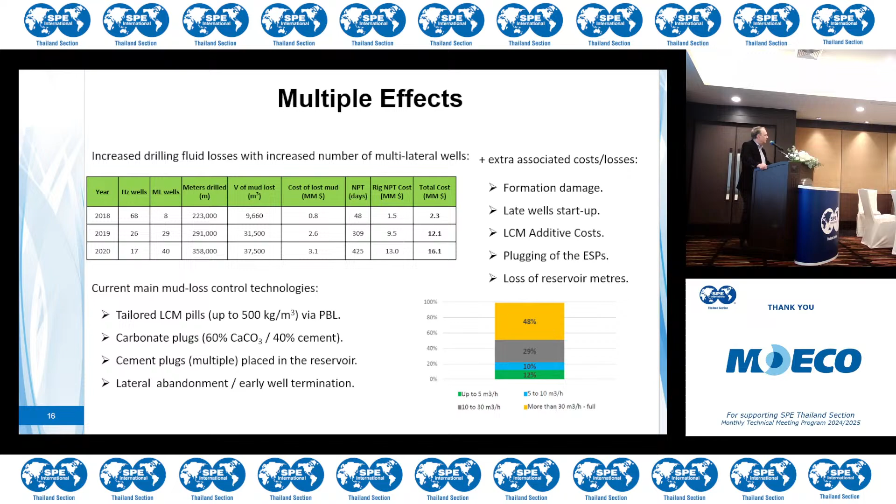And then your third point was about how to. I'm not sure you know about our wonderful reservoirs here. We have a few carbonates and a lot of lacustrine and interbedded river systems. So I'm just wondering if you had a chance to think about our reservoirs and how we could apply this technology. Yeah, let me turn it around and put it in a different way.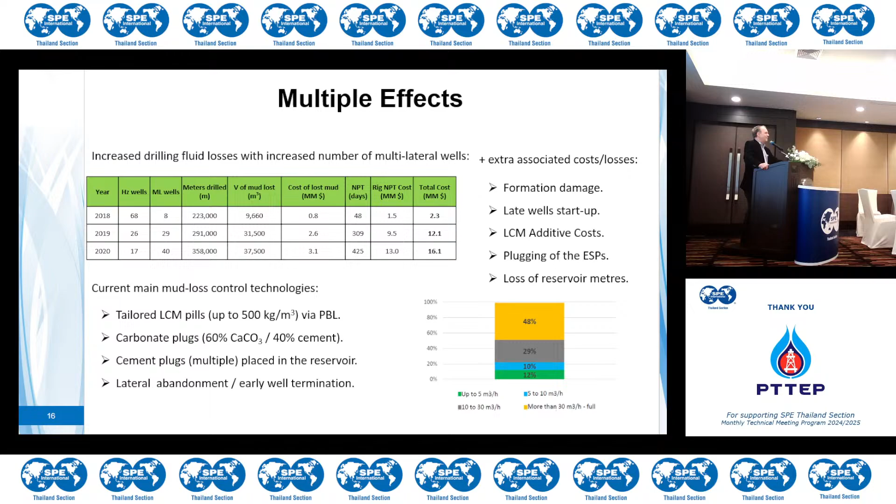I love technology and I love technical. People think of me as a frac engineer, but I'm kind of a well enhancement engineer. I like to solve problems. So if there's a problem that needs resolving, if major losses, drilling lots of hole in the reservoir, or PI on wells is a major issue, then yeah. I tend not to come up with technical solutions and then try and create problems for them. It's the other way. And so, what are the driving factors here? Because they do differ around the world.

I'm thoroughly impressed, for multilaterals, when I go to Canada and see what they've done in Canada. It's just not published. The amount of meterage that they drill in a single hole within the reservoir in tight oil is just phenomenal, and there's so little published about it. I find it astonishing. I'd be screaming from the rooftops that I was putting 30,000 meters in a tight oil reservoir cost effectively if I was doing it, but I guess they're just too busy doing it to talk about it.

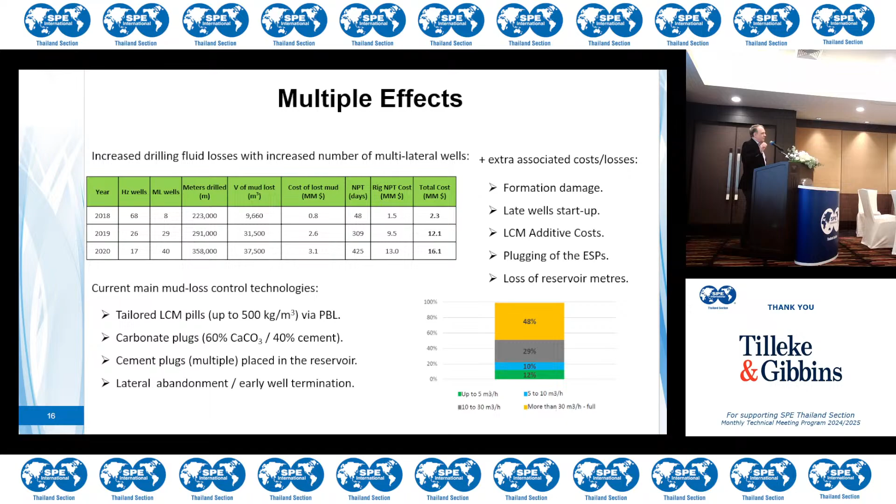So there are great solutions out there, but I think on a case by case basis, you break down what are the underlying factors that make my reservoirs challenging? Is it PI? Is it water breakthrough? What's the pressure support? What's the mix? And then what are the technologies that suit taking that on? But this will just become for me another weapon in my arsenal that I will keep at the back of my head. And when I spot something, go and read that paper or go and have a look at that. Like the kid's crying or something, you throw some hollow glass. There you go. Yeah. Thank you.

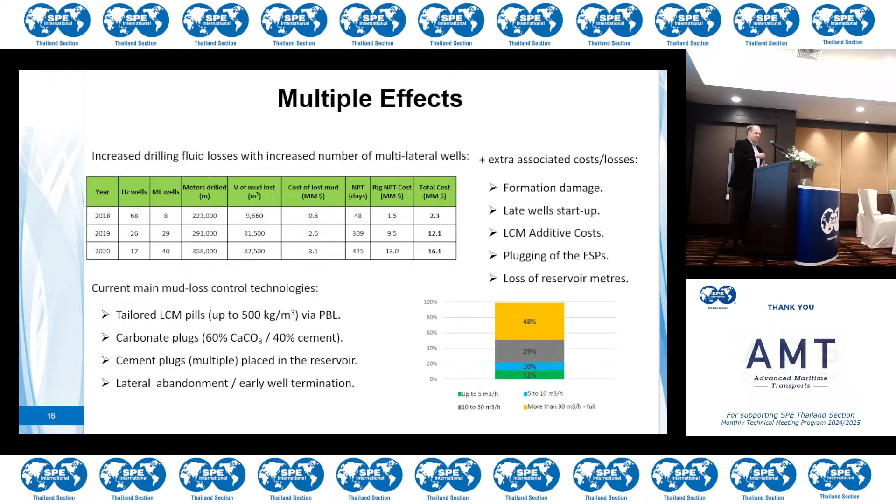Any more questions? Students, you want to ask something? You've been prepared.

Hi, my name is Warrington Bourne Kipakon, and I'm here from Chulalongkorn University, Faculty of Science, Geology. I think you mentioned the HGS liquid after you use it. So when 10% was lost, how about the 90% left? Do you reuse this or do you have another way to deal with it?

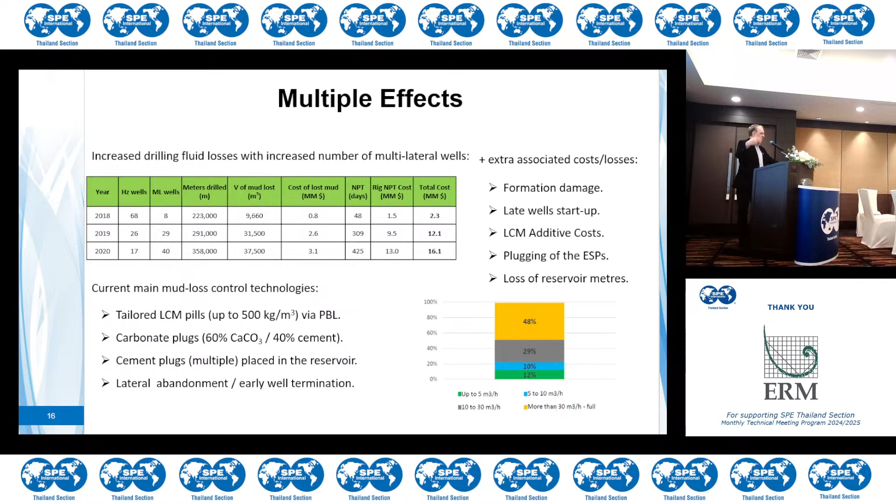Yeah, so a large part of the economics is ensuring that the circulation system retains the appropriate level of hollow glass spheres, and so you set up your separation system to recover that 90%, and add sufficient volumes to continue drilling. Although, as indicated, the stress cage effect, which I don't know how far they've progressed with, allows you to drill off and change that threshold pressure.

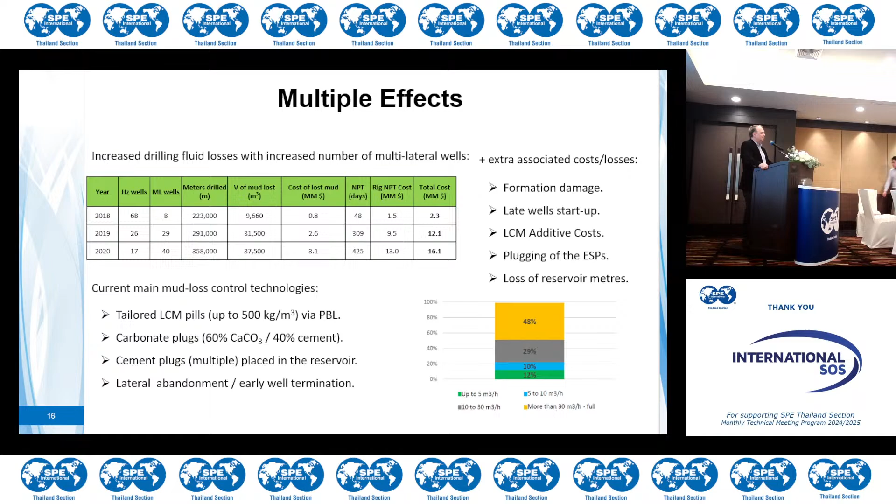I find stress cage an entirely fascinating subject as a frac engineer. I've been arguing about what frac width is for 40 years, and then the mud men in drilling decided what the width was and came up with a particle distribution to plug it in a couple of years, it seems. So the stress cage approach allows you to change that threshold, which allows you to reduce the concentration of HGS. So there's a lot of optimization to do on a case-by-case basis, and it's all related to cost.

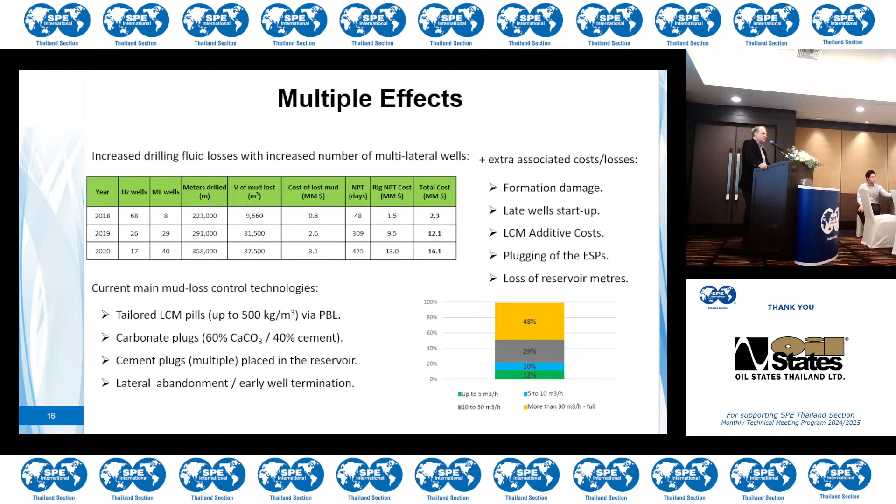As I say, the original spheres were quite expensive because there was only one manufacturer. Now there are multiple manufacturers, and it's an extremely affordable additive. So yeah, a fluid loss additive was what we did with the waste material. It got put to good use, and I'm sure that there'll be other applications of the hollow glass spheres in the drilling environment as well, now we're comfortable with it in a mud. Thank you for the question. Thank you.

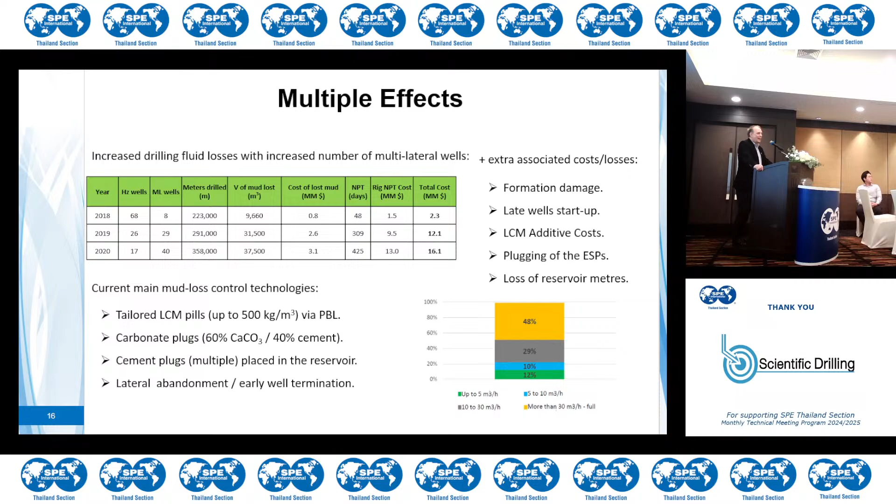Hi, thank you for your talk. My name is Krawan from PTTEP. I'm not a driller, I'm a geologist. It's quite a new subject for me, but I'm thinking about the condition in Thailand where we have high temperature, high pressure. Would the hollow sphere glass be suitable for this environment, or if it's not suitable, would there be future innovation that would lead to something similar that could work in our environment or reservoir?

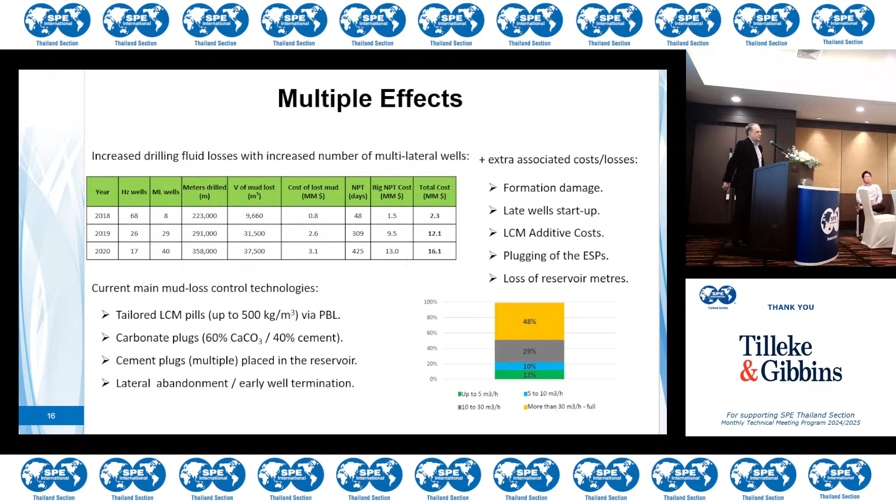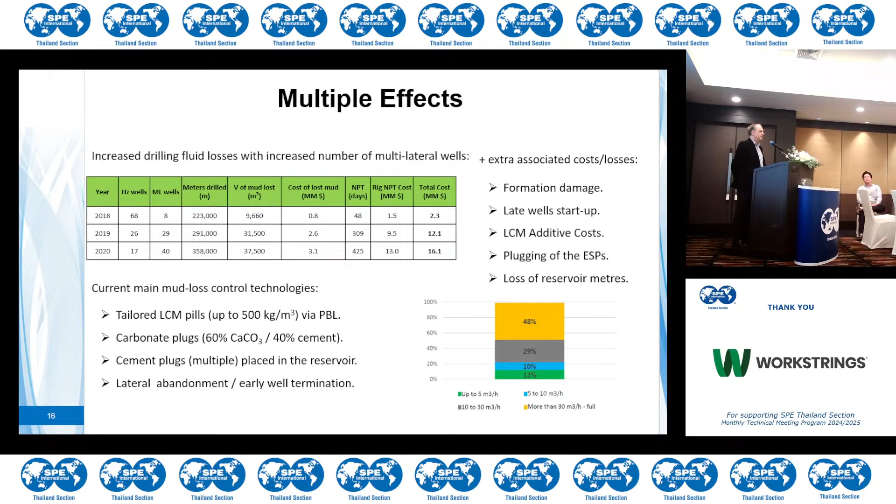It's a good question. The spheres themselves, there is no temperature limitation really on the spheres. From a pressure perspective, the crush resistance that you choose would be directly related to the environment that you're working in. So you can get them up to 19,000 psi crush resistance, which is an extremely stubborn environment. I wouldn't think that you would need that even in HPHT here. So the material, it's a boring material. It's been around decades. It's just that this is a different use for it, which the industry has touched upon, but never really taken on.

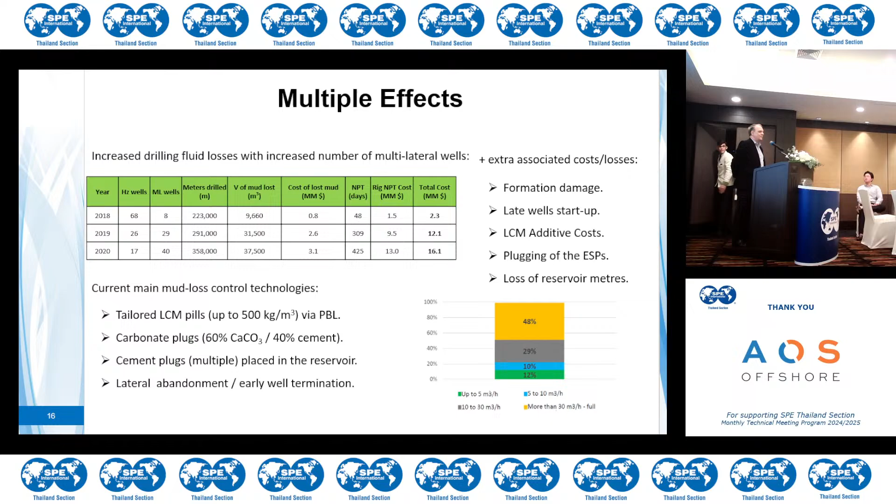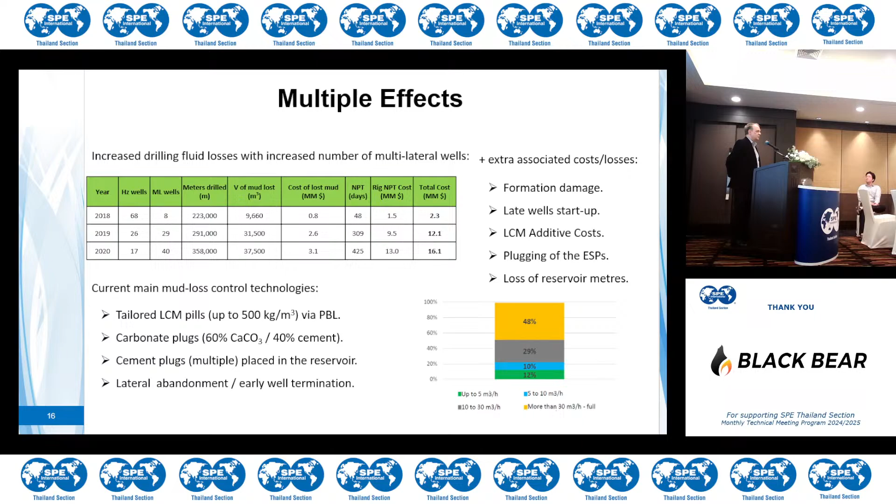And that's why I raised the point about Exxon. It's interesting to see Exxon doing research in this area, and then publishing on it, because they never publish. So seeing them doing this fundamental research and publishing on it says to me that they've got an asset somewhere that they're going to put this to work on pretty quick, and they were calling around looking for feedback. So I expect we're going to see more published on the use of hollow glass spheres for drilling entire reservoir sections in the future. Thank you for the question.